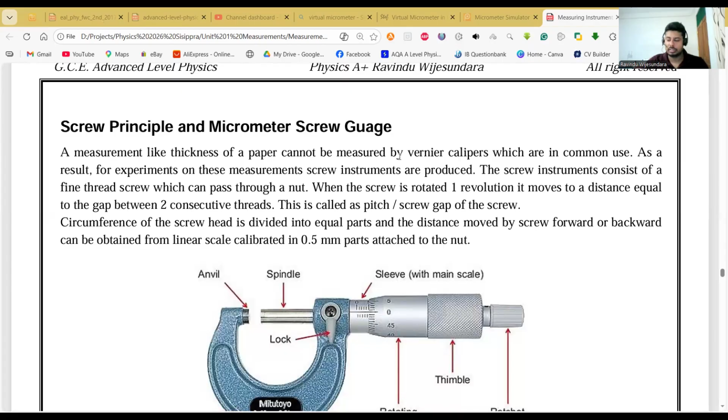Let me show you a virtual simulation of the micrometer screw gauge first. Then we will discuss the important points to be known. We'll discuss the main components there, and then move into the reading part.

So here you have a virtual micrometer. I will put the background to white so it's clearly visible to you. You can see here, this is the structure of the micrometer.

There are a few things that should be considered when you are taking a micrometer screw gauge in your hand. The first one is, as in the vernier caliper, we need to know the minimum measurement that can be taken and the maximum measurement that can be taken. That is called the measuring range - what is the minimum, what is the maximum reading we can take.

Usually a micrometer is used to measure distances much smaller than 5 centimeters. The vernier caliper you can use up to 15 centimeters as I showed you last day, but the micrometer we do not use for such larger measurements. We use it only for smaller measurements, like 3 centimeters or 2 centimeters.

Now, if I completely move the ratchet with the thimble to the other side, let's check what will be the maximum reading that can be taken from this one. So if I rotate this one and check.

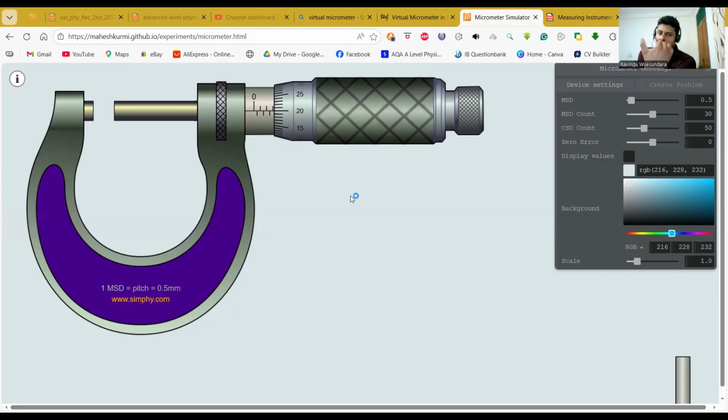You see here you can check the screw principle using this one. Take the right hand. Now I will rotate this one, then you can check to what direction it will rotate. I am rotating in this direction, so you put your fingers this way towards your side, and you can see it is moving to the left side - the thumb is showing the right hand direction. So our screw principle is working for this one.

Now, if I rotate to the other side, you can clearly see it rotating in this direction towards the screen. It is rotating towards the screen, therefore it is moving in the right hand direction. So you can apply the screw principle and check whether it is working accordingly.

If I completely move this one to the left hand side, then I can get the maximum reading there. You can see here, this is the 5 millimeter mark. Let me try to move it fast here. So it is actually around 2 to maximum 3 centimeters distance, so the range of this one will be around 30 millimeters.

Now let's see the main scale. You can see here the main scale clearly - here you have millimeter marks. Here 0, here 1. Let me take the laser pointer, then it will be easy for you to see. So these are millimeter scales: 0, 1, 2, 3, 4, 5, like that way.

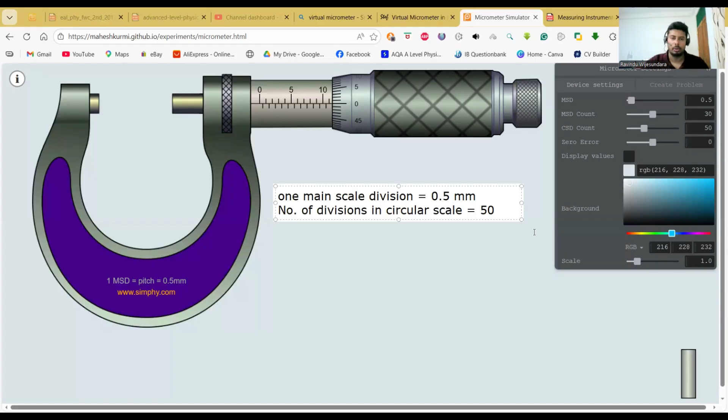Now, let's see, these are the information that we have. Let's see how to calculate the least count of this equipment. So the least count is the lowest or smallest measurement that can be taken from this instrument. Before going to that, we actually need a special term.

Screws have something called a pitch. So what do you mean by pitch is the distance traveled by the screw linearly. This is the total screw, right? The distance traveled by the screw linearly when one complete rotation is done in the circular part. That is called the pitch. It's a small definition. So we call it pitch. Pitch equals

linear distance traveled during one complete rotation. This is called the pitch.

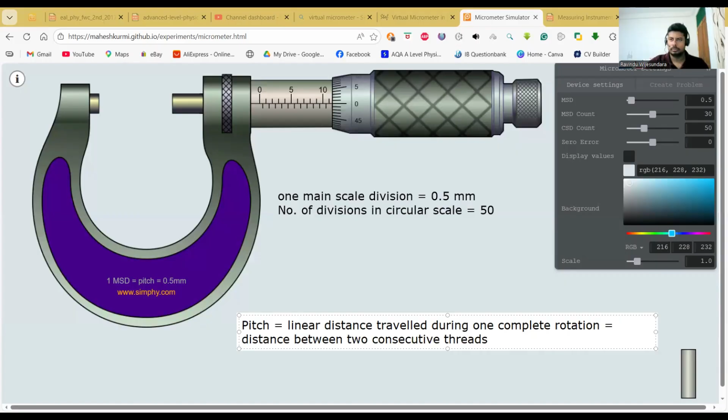We call this the thread angle, and also the pitch angle. That is also considered, but for our case, we only need to know about the pitch. The pitch is basically the distance between two consecutive threads, and it is exactly equal to the distance traveled when we rotate by one rotation.

So if I rotate this one revolution, let's check how much distance it will travel. First I will take this to a clear position, somewhere here.

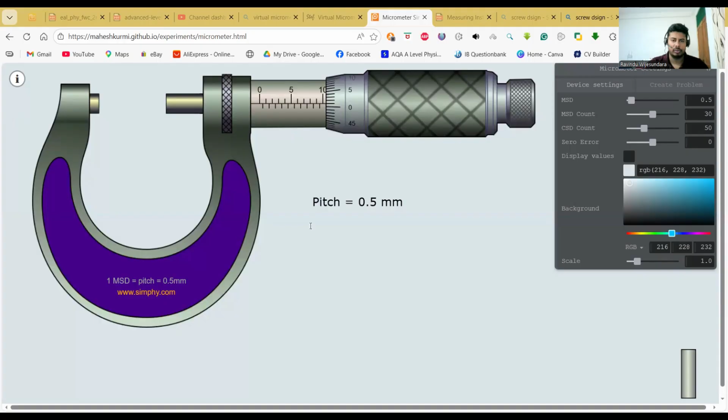Least count is equal to... if I move the circular scale by 50 divisions, it moves 0.5 millimeters, so I need to find the distance moved per one division. I have to divide 0.5 by 50 millimeters, and you get the answer as 0.01 millimeters. So you can see this has a very small least count.

That means the accuracy of this instrument is much greater than the vernier scale. So the micrometer screw gauge accuracy is greater than the vernier caliper accuracy. I hope this is clear.

If you generalize this formula, the least count formula can be written as: least count equals 0.5 millimeters, which is the pitch of the instrument, divided by 50. What do you mean by this 50? It is the number of divisions in the circular scale.

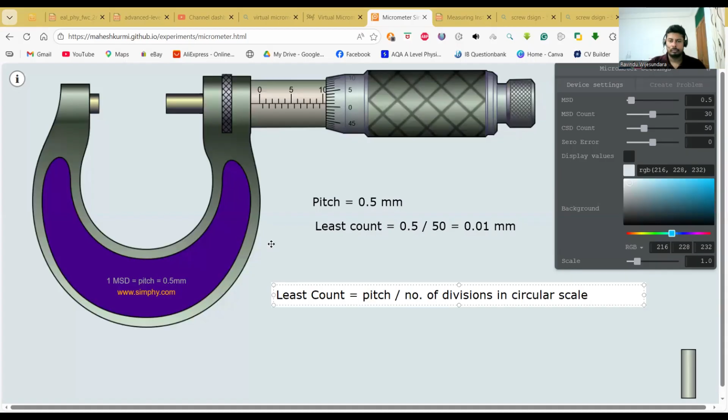So let's go one by one to get the reading methodology, how to read this one. Let me erase this. So the reading is actually similar to the vernier caliper - first you have to take the main scale reading.

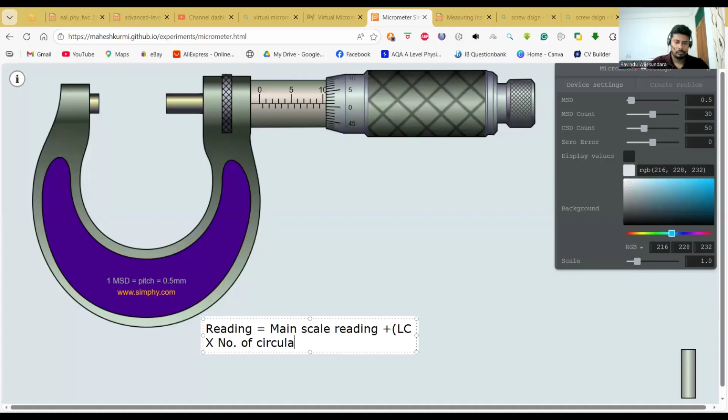First you take the main scale reading. Then you have to add the least count multiplied by the number of circular scale divisions. Least count multiplied by number of circular scale divisions, number of circular scale divisions. So this is how you read the micrometer screw gauge, right?

So you just need to keep this in mind. This is similar to the vernier caliper. We have done a lot of examples last week regarding the vernier caliper. The same procedure you can follow. Rather than saying the number of divisions coincide with the main scale like in vernier caliper, here you have to get the number of circular scale divisions coinciding with the main axis of the main scale.

Okay, now let's see, we will read some values. So let's say I am moving this one to this side and I am randomly stopping this one somewhere.

So what we have to do is we have to read this one. What is the reading of this one? Let's say I am stopping somewhere here. A random stoppage, I did a random stoppage. Now we have to read this one. Now we will carefully look at what is the main scale reading.

So if you go here it is the 5th millimeter mark, then 6, 7, 8, and 9. Now you are checking the edge of the micrometer screw gauge, checking which main scale division is passed by the edge. So if you see clearly, 6, 7, 8, and 9 millimeter has already been passed. So the main scale reading is 9.

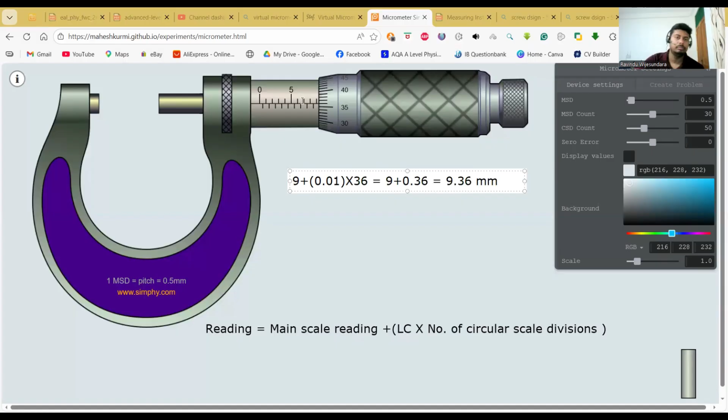I hope this is clear how to take it. This is not actually difficult, it's very easy, but we have to be very careful when we are taking what we call the main scale reading.

Okay, we'll try another example quickly. So I will turn this one and randomly stop it, right? We'll turn the bit to somewhere here. Okay, I will stop. Now let's see how to read this one.

Now if you check here, what is the main scale reading? So you can see 5, 6, 7, and you also can see the bottom line visible, which means the 0.5 mark. That means 6, 7, and 7.5. So it has actually turned up to 7.5. So the main scale reading will be 7.5 millimeters.

Plus, you have to put the least count, 0.01, multiplied by the number of circular scale divisions. If you see here, you can clearly see that is 41. Therefore you take the summation of these two, 7.5 plus 0.41, which will finally give you 7.91. Therefore the reading is 7.91 millimeters.

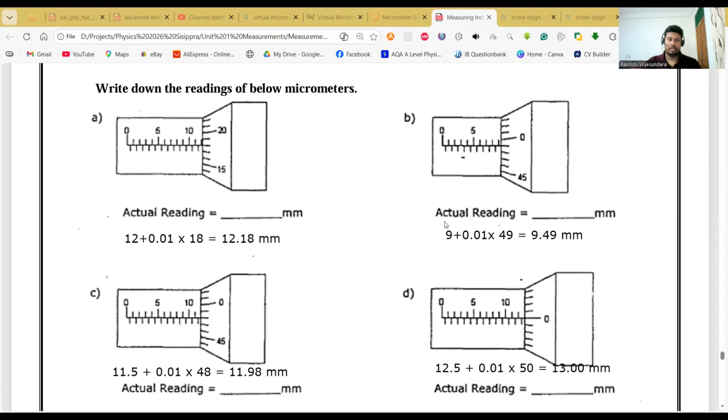Now we'll move to the next few examples. If I have made any mistakes here, now try to correct them in the following examples. Now you try to do these 4 examples without getting wrong. Now you can do this one, so try to do this one now.

If you go to question number G, you can see the main scale reading, that is basically 13.5. Therefore, 13.5 plus 0.01 multiplied by 31. Therefore, you can see here that is 13.81 millimeters. Those who have got this correct, very good.

Then if you go to question number H, you can see here the main scale reading is 1, 2, 3, and you have a small mark here that is 3.5. 3.5 plus 0.01 multiplied by 35. Therefore, it will be 3.85.

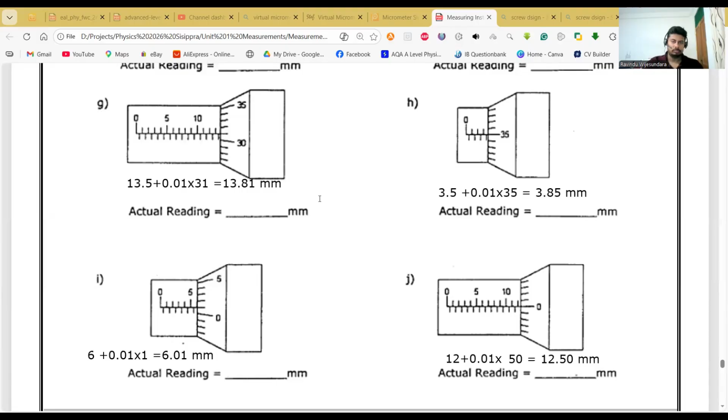Now let's move to the systematic errors associated with the micrometer screw gauges. What are these errors? Like in the vernier caliper, we have two kinds of possible errors in micrometers also. Right here, these are labeled as positive zero error and negative zero error.

So how to identify whether there's a zero error or not? Let's check how to identify that. When the end of the screw and the surface of the stud are in contact with each other, the linear scale and the circular scale reading should be zero.

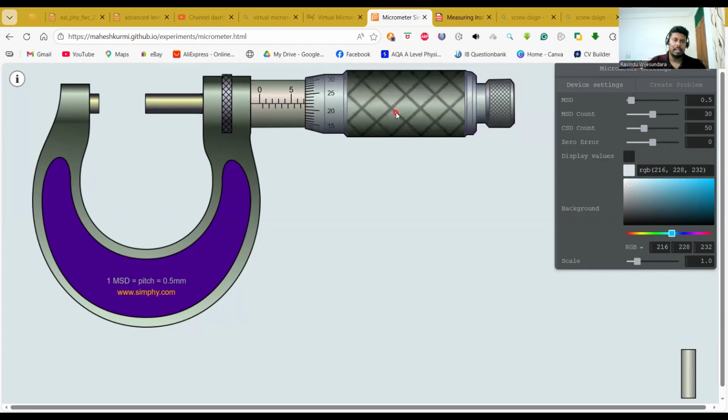If I use the virtual micrometer screw gauge to demonstrate that, what you have to do is rotate this in this direction until the anvil and its spindle touch each other. Rotate like that until the anvil and the spindle are touching each other. I will rotate faster.

These simulations are free and you can see them actually. This is very good. So there you can understand what is actually happening here. Okay, now you can see.

Do you hear some sound? Tick, tick, tack sound, can you hear that? In this simulator also you are getting a tick, tick sound. When you come here and still try to rotate this one, it gives a tick, tick sound. That means you cannot turn furthermore because the anvil and spindle are already in contact with each other, so you cannot move this spindle more forward.

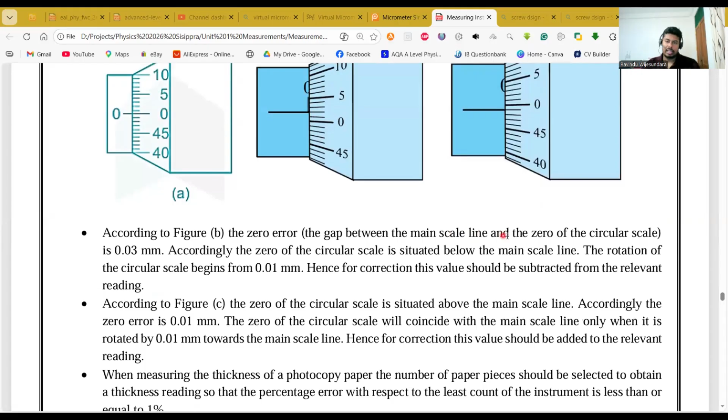According to figure B, the zero error, the gap between the main scale line and the zero of the circular scale is 0.03. So if you go here, you have to calculate the distance from here to here. So it is actually not 0.03. This value is wrong, we have to correct this one.

This is the mark which is coinciding with the main scale. Now you count downwards to where the zero of the circular scale is located. Then there are two divisions, that means 0.01 multiplied by 2. Therefore, the zero error of this one is plus

0.02 millimeters, right? Now, if you go here, you can see clearly it has got one division more. Therefore, this one has a negative zero error and it should be 0.01, because only one division is rotated in the upstream, right.

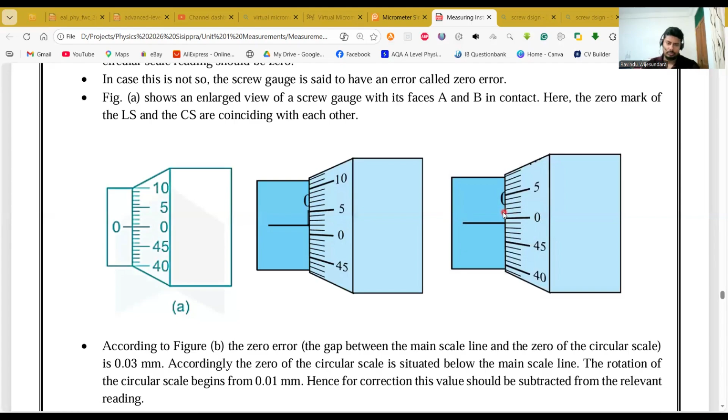Okay, according to figure C, the zero error of the scale - you have given the same description there, how to get that one.

Right, okay, now let's see what are the zero errors of the following micrometer screw gauges, whether it is a positive zero error or a negative zero error. Okay, now I will show you how to do the first question, then you can continue with the other questions.

If you go to the first question, now you can see here, this has been early stopped because we have to rotate this one furthermore to bring the zero mark of the circular scale to the main scale zero mark. You have to further rotate this one like this way. Then only it will come here.

You can use this principle also, this right hand principle also. We use this right hand principle. So you have to turn, you have to move the micrometer in this direction, left hand direction - the edge of the circular scale, you have to move to the left hand direction. Then you have to turn like this.

So when you are turning like this, it has stopped earlier. How many divisions earlier? 1, 2, 3 - three divisions earlier. Therefore, your zero error value is plus 0.01 multiplied by 3, that is 0.03 millimeters. This is the answer of that one.

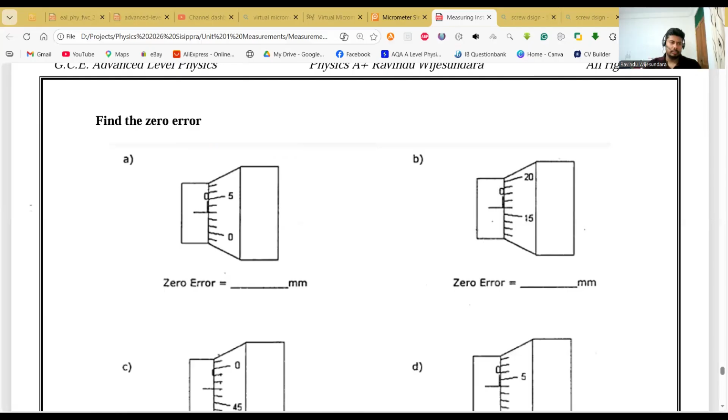Now, you can use the same methodology, the same way that you read the micrometer screw gauge readings, to get the zero errors of the others also. Right, now it's time for you to do this one. So quickly try to get the zero errors of these micrometer screw gauges. So you have 4 examples to complete. Okay, quickly start and do that one.

Okay, now if you go here, the first one we have discussed, and the second one - let's discuss the second one. So here also you can see the main scale zero is not yet reached, right? So if you rotate more, then only it will come to here. And you can see the line of the zero mark also, that means it has been stopped a bit earlier, right.

Therefore, if you go here, what should be the main scale reading? That is 0 actually. So you have to multiply 0.01 by the number of divisions - how many divisions is it actually?

The variation is how much divisions? We have to rotate more. So this is the 16th one. 15, 16. Therefore, you have to rotate this one 16 divisions more to bring 0 to here. Then only you can make 0 and 0 coincide. Therefore, you have to rotate 16 divisions.

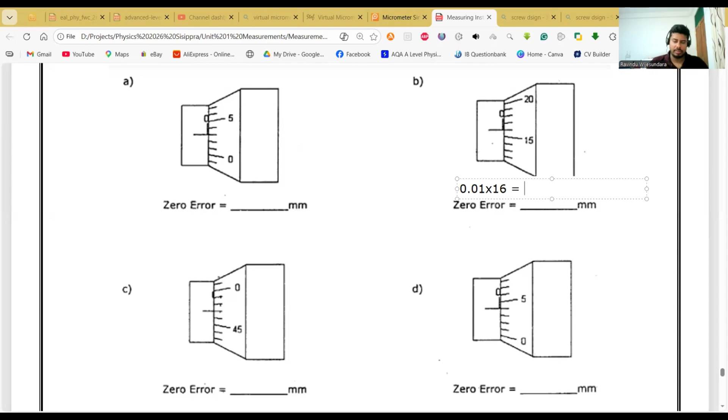That means the error is, it is pre-stop. That means a positive zero error and the value is 0.16 millimeters. This is the 16th, right? Okay, now if you go to here, the C1, so you can see here,

0 of the main scale is located somewhere here, and you can clearly see that it has overturned now. That means the 0 of the circular scale has already passed the main scale 0. So definitely this should be a negative zero error. And how many divisions? 1, 2, and 3 divisions. So it should be negative 0.01 multiplied by 3. That means negative 0.03 millimeters. That is for C.

If you go to the D one, you can again see here clearly it has been pre-stopped. So you have to rotate this amount of divisions to bring this 0 to here. That means 0.01 multiplied by how many divisions to rotate to get to 0? 1, 2, 3, and 4. Therefore, this is a positive zero error, that is 0.04 millimeters. So all these positive zero errors that you have obtained must be reduced from the final reading.

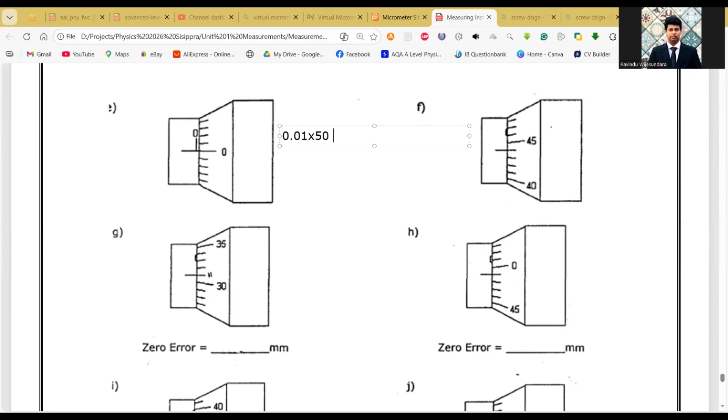That means it should be a positive zero error. That means 0.01 has to be multiplied by, here the number of divisions should be 50, not 0. Then 0.50 millimeters is the zero error of this one. Right? Okay, if you go to here to get the zero error of this one, sorry, I have turned off the camera.

Okay, then if I go to here to get the zero error, so what will be the zero error here? So here the main scale division, you cannot see actually 0. That means this has turned more past the main scale 0. So how many divisions has it turned more? So this one is actually 40, 41, 42, 43 and 44 divisions. It has been here. So how many divisions

away from actually 50? So what is the difference between this point and the 0th mark? The 0th mark will be located somewhere at the top, right? So you know that if it is 45, 46, 47, 48, 49 and 50, so there are how many divisions? 6 divisions are there, right? 44 to 50 means 6 divisions are there. Therefore, this has been moved 6 divisions more towards the 0. Therefore, the zero error must be negative, 0.01 multiplied by 6. Therefore, negative 0.06 millimeters is the zero error.

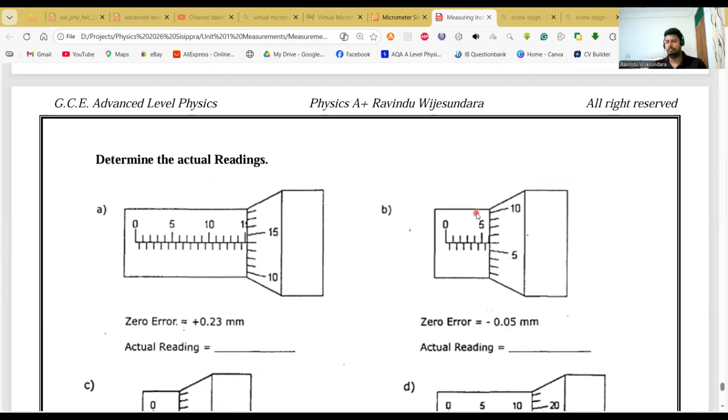Then, how to determine the correct reading. So in these examples, I have actually given the value of the zero error. So you have to eliminate the positive zero error, you have to reduce the value. To eliminate the negative zero error, you have to add the value. That is what you have to do, right? So in all the examples, I have already given the zero error value, so you have to write down the actual reading.

Okay, so let's start with the first four, A, B, C, D. So like earlier, I will give you 2-3 minutes. Please try this one. This is important because today also I will show you the A-level examination question examples from this one. Right? Okay, quickly do this one now.

Now, if you go to the question G, then we can write the main scale reading first. What is the main scale reading here? If I write from here, the main scale is 11 and 11.5. 11.5 plus 0.01 multiplied by

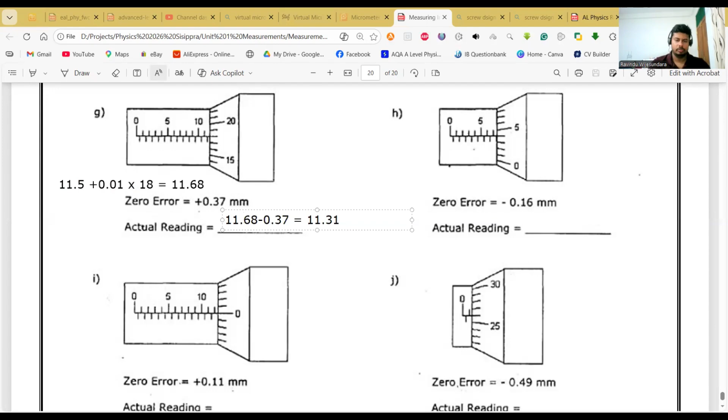11.31 millimeters. If you go to this one, then what is the main scale reading? You can see here 6, 7, and here also you can see it has been only 4. That means in order to get 4, first you have to pass 0. So it must be, it has not reached yet the 8th mark, but you can see, if you see from the bottom, it has just passed the 7.5 mark.

So the main scale reading is 7.5, and you have to add 0.01 multiplied by 4. Therefore, the final answer is 7.54, and then we have to add 0.16 for this one. 7.54 plus 0.16. So this will give you 54 plus 16, 64, 70, 7.70

millimeters. Right. If you go to question number I here, so you can see it is the main scale reading. You can see here it is 1, 2, is 12, and it is again completely 0. That means the main scale reading must be 12.5 plus 0.01 multiplied by, there are no divisions passed, it is exactly 12.50.

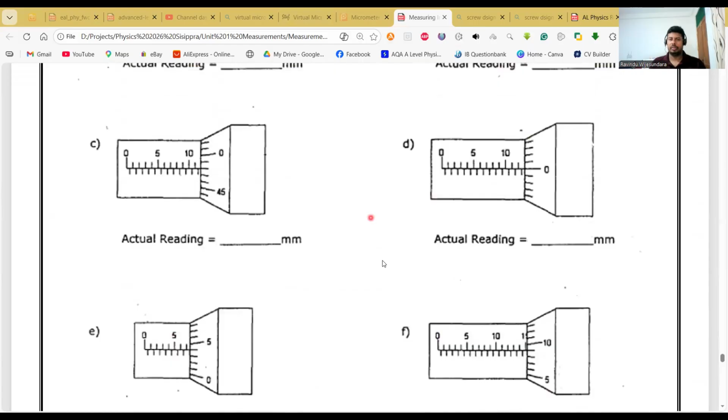So these are the corrected readings of these examples. I hope you have completed the examples along with me. Now, if you have any questions regarding the examples we discussed, please raise them. Okay, so this is what we have to discuss about the micrometer screw gauge.

This is how to take the reading. This is how to take the zero error. This is how to calculate the least count. Now you know how to use two measuring instruments: the first is the vernier caliper, and the second is the micrometer screw gauge, which is even more accurate.

But both of these equipments have one constraint. Each time you take a measurement, you have to keep the object in between two parts. In the vernier caliper, you have external jaws or internal jaws, and you have to tighten it. Here we have the anvil and the spindle, and you have to tighten the object in between these two components.

So if you do not have a rigid body like a metal ball, a stone, or hard plastic, then you cannot actually measure. If you have a rubber ball or a balloon, if you have flexible material, then there's a problem using these instruments. It is not possible to measure, because when you tighten the instrument to keep the object between the jaws, it will deform, and then you cannot take the measurement.

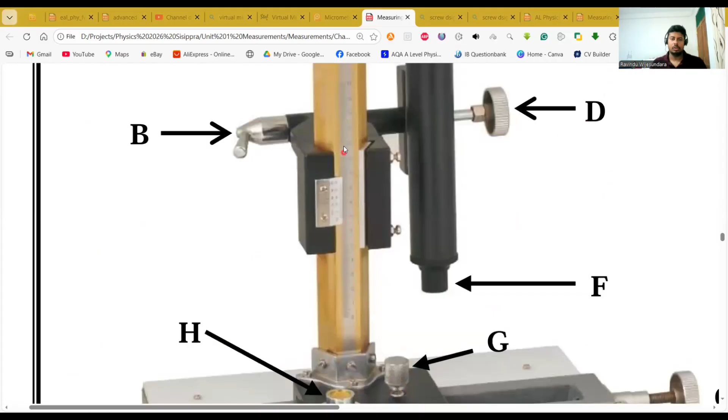And you can see here there's a small scale also. This is actually a type of vernier, a vernier scale. Right here is the vernier scale, and right here is the main scale.

Now if you move to part B, that is the screw to fix the microscope vertically and horizontally. Now if you keep it like this, when you are taking a measurement, if this gets a shot from your hand, a mistaken shot, then this one turns away and you have to focus again. So there must be some locking mechanism, and B is used to lock this one.

So if you make it horizontal, you lock from here, then it is fixed. If you need to look vertically, you turn the microscope vertically, then lock. So B is the screw to fix the microscope vertically and horizontally.

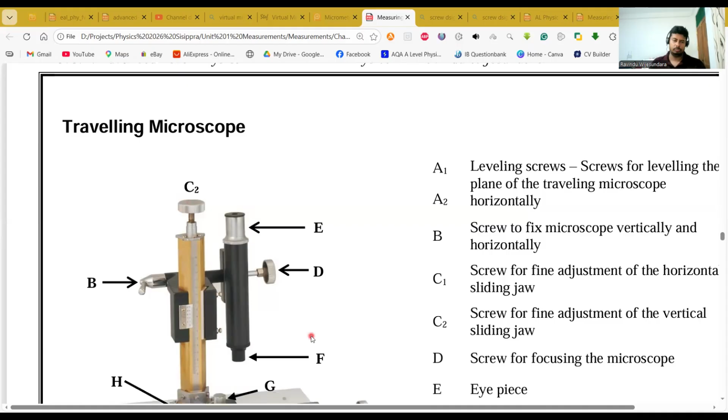Then if you go to C2, this is for the fine adjustment of the vertical sliding jaw. What is that vertical sliding jaw? This whole part attached to the gold color part is like a jaw, that is why we call it the sliding jaw. You can move this sliding jaw up and down, and you do that by using this C2 screw.

Screw C2 is for the fine adjustment of the vertical sliding jaw, meaning very small adjustments. For large adjustments, you use B to loosen and move the complete jaw up and down wherever necessary, then bring it to the required point and tighten it so the sliding jaw is fixed. Now if you need very fine adjustment, like half a millimeter, you use the C2 screw for vertical adjustment.

We have already discussed these parts: this is the vertical sliding jaw, this is the locking pin or locking screw, this is the fine adjustment screw for the vertical sliding jaw, this is the eyepiece, this is the focusing screw of the microscope, and F is the objective piece. Next is the bottom part.

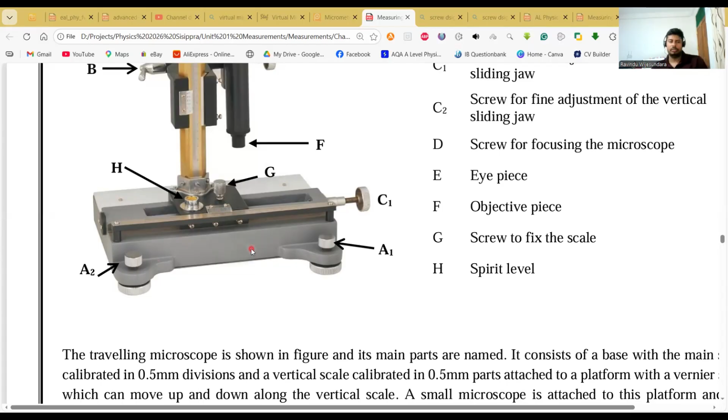So you don't need four screws to adjust - using only these two, A1 and A2, you can do it. How you adjust is: you first adjust one, then adjust the other, not both at once. You adjust one first, then look at the level, then adjust the other. Doing this a few times, you can adjust it quickly.

Now H is the spirit level, used to check the horizontal level of the microscope unit. Then G is actually used to fix this vertical unit. Why do we need to fix the vertical unit? Because the vertical unit is movable actually.

You can see this C1 screw, labeled fine adjustment of horizontal sliding jaw. Similar to the vertical sliding jaw, this one is fixed to a bar. This bottom black part is placed on this bar, and importantly, you can move this along this section. This is the screw to push or pull it - rotate in one direction to push it forward, rotate the other way to pull it back.

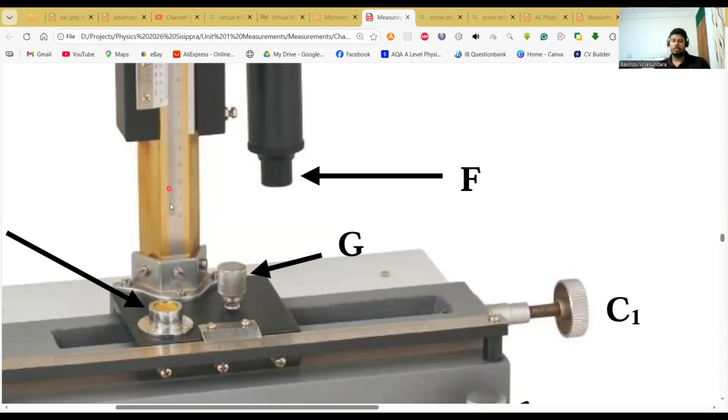Here also we have placed a scale with a vernier scale, meaning we can move this part horizontally. So we have this part to move the microscope unit vertically up and down for height measurements, and all horizontal measurements using this scale. So actually this is a 2D measuring instrument - you can measure two-dimensionally using this instrument.

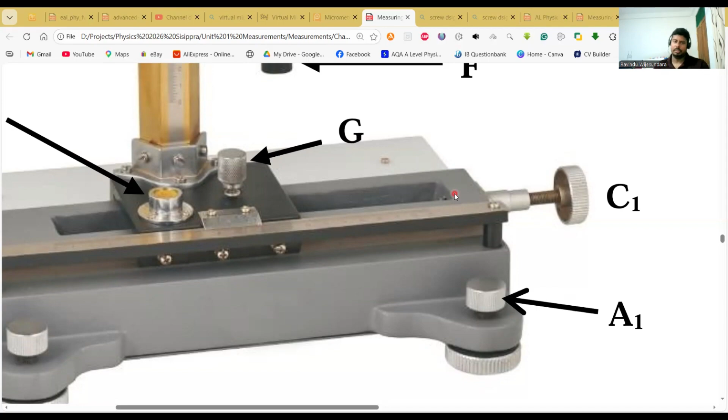Okay, so these are the main components of a traveling microscope. So is it important to know these parts? Are they going to ask these questions in the examination? Yes, no one thought that this one will ever be asked, right? They have asked the micrometer, screw gauge, the vernier caliper - most times they have asked those instruments in the A-level examination. They never thought that this much of a complex instrument would ever be directly asked in a question paper.

But what happened is in 2018, they asked this one. They completely gave this instrument to identify the parts, right? So if I quickly take you to that question, we'll see whether we can answer that one or not. Let me quickly take you there.

And papers here. We have the English medium paper, right?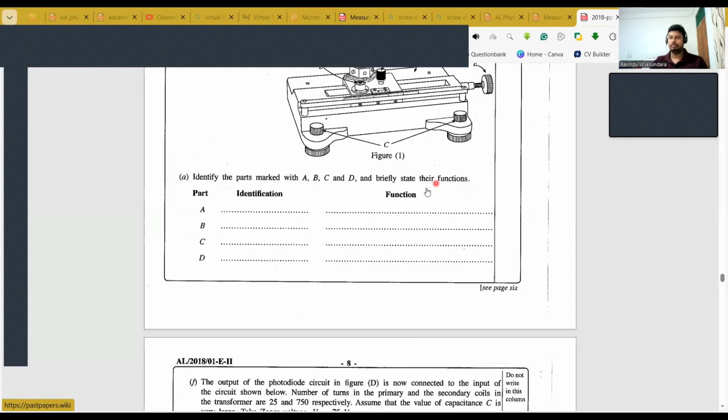So you are given this instrument - see what is the first question. Identify the parts marked A, B, C, D and briefly state their functions. So if you go quickly and identify, now you know what is this A?

This is the screw for fine adjustment of the vertical sliding jaw. You don't need to write the exact words, but you need to convey the idea. So the function of A is: if you rotate this one, you can move the vertical sliding jaw up and down. That is the function of A.

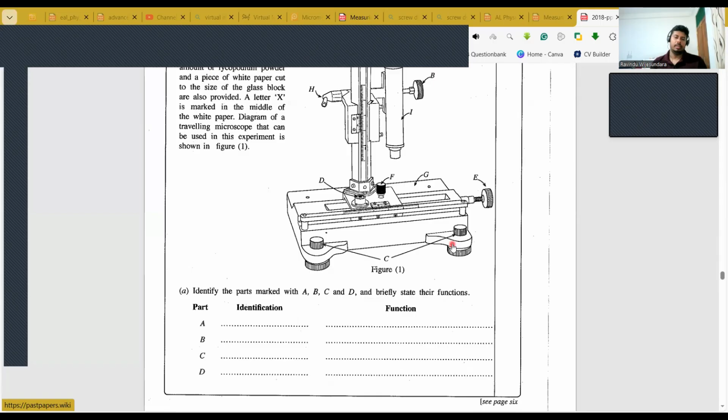Then the function of B is to focus - this is the focusing screw. The function is to focus the microscope onto the object. That is the function of B. Then the function of C - you have two screws here - is to level the instrument. Then D is the spirit level, you can see here. The function of the spirit level is to check the level of the instrument.

If only A, B, C, D is asked, that's enough, but if you go further: E is used to move the horizontal sliding jaw - fine adjustment of horizontal sliding jaw. F means the fixing screw - that means when you move the horizontal sliding jaw some distance, then you fix that part, so that is the function of F. This G actually means the

microscope frame - traveling microscope frame is capital G. And H, you know now, this is the locking screw of the sliding jaw. And I is the microscope itself. But they didn't ask about E through I, they only asked about A, B, C, D and their functions.

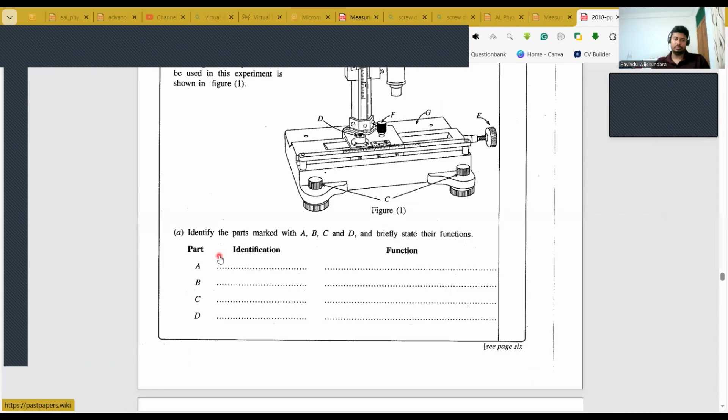So they will never ask about the complete instrument, but they ask only part and then you have to answer. This is a surprise question for all, because if you check all the past papers, you can check up to the 1980s, no issue, you will never find this one. But in 2018, they gave that as part of the structured essay question, and this part actually carried the highest marks. So that is the importance of

paying attention to the lessons and doing the past papers. Those who have done the past papers also wouldn't directly know the answer, but when you do the past papers, you know that this hasn't been asked before, so there's a possibility it could come up. That's why I said, if you do the past papers, you know what instruments have already been asked and what remaining parts they could ask. The importance is really about what hasn't already been asked, what is likely to be asked. So those who actually prepared with this in mind scored a lot by using this question.

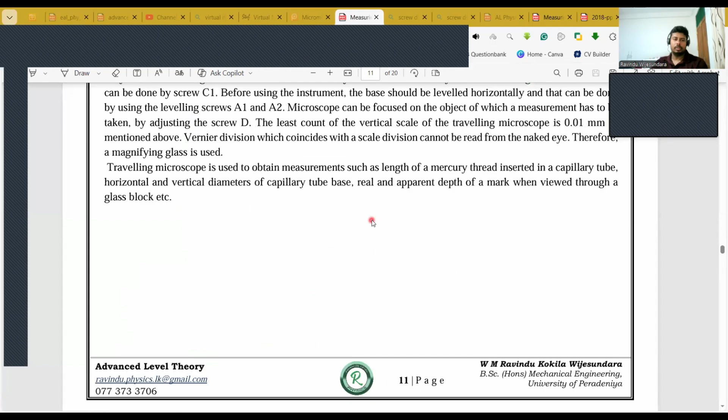Now, we know the uses of this one. So what is the use of this one? So now we will actually go through the statement. Okay, you can highlight when you get the tutorial, you can highlight the important parts.

The traveling microscope is shown in the figure and its main parts are named. It consists of a base with the main scale calibrated in 0.5 millimeter divisions, and a vertical scale calibrated in 0.5 millimeter parts attached to a platform with a vernier scale which can move up and down along the vertical scale. So you have two main scales: a vertical main scale and a horizontal main scale.

The minimum division, the smallest division, is 0.5 millimeters. So they have divided 1 millimeter into two parts. So the divisions are in 0.5 millimeters. And you have a vernier caliper, or a vernier scale.

A small microscope is attached to this platform and the microscope can be fixed in a horizontal or vertical position according to the needs. As I mentioned earlier, by using this B screw, you can lock that one in vertical or horizontal position.

By moving the horizontal platform along the horizontal scale, the microscope can be moved horizontally and the horizontal distance moved can be obtained from the horizontal scale. So you can measure how much horizontal distance it has moved by referring to the horizontal scale.

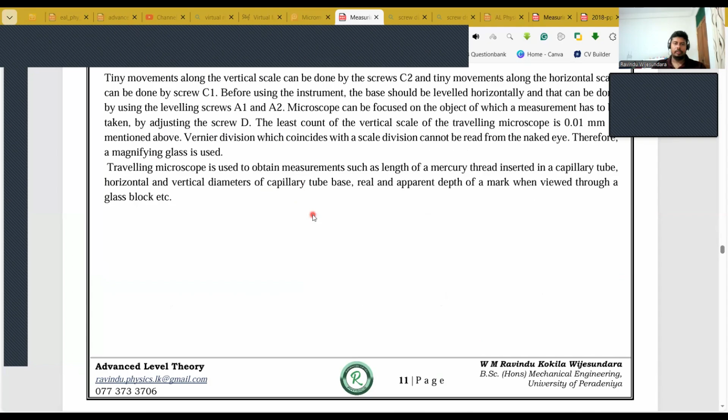The least count of the vertical scale of the traveling microscope is 0.01 millimeters. That is the same as the micrometer screw gauge, right? The least count of the vertical scale of the traveling microscope is 0.01 millimeters.

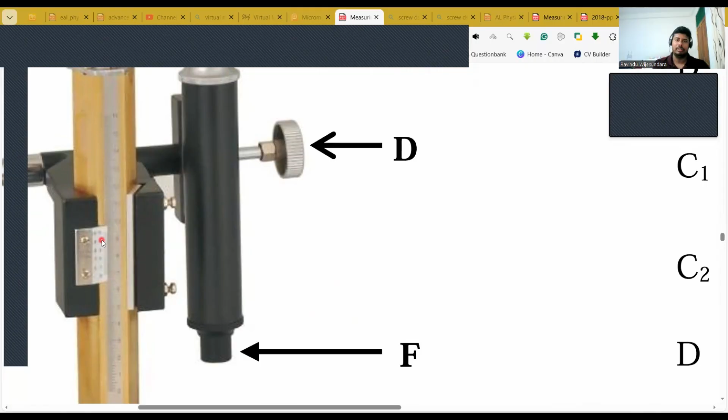The vernier division which coincides with the scale division cannot be read with the naked eye. Therefore, a magnifying glass is used. These marks are very tiny, right, because the main scale is marked in 0.5 millimeters and the vernier divisions are even smaller. So if you really get this instrument at home, you actually cannot read the values properly. When taking a reading from a vernier scale, you have to find the coinciding division, and you cannot do this with the naked eye because the marks are very tiny. Therefore, you have to introduce a magnifying glass for that.

The traveling microscope is used to obtain measurements such as the length of a mercury thread inserted in a capillary tube. This is one kind of measurement, right? A capillary tube is a very small tube. For example, consider the tube of a pen - we can say it's a large capillary tube. So this is your pen, this is actually a type of capillary tube, but this one is a bit larger.

There are tubes which are much smaller than this. Consider a needle where medicine is injected into your body - the diameter of that needle, that kind of thing, is called a capillary tube, very tiny, right? So this one is also a kind of capillary tube. If you need to find the diameter of this, since it has a very small internal diameter, you cannot use either the vernier caliper or the micrometer screw gauge. You have to use the traveling microscope, right?

And it is given that the traveling microscope is used to obtain measurements such as the length of a mercury thread inserted into a capillary tube. Just imagine this is mercury - it's actually ink, but let's assume this is mercury.

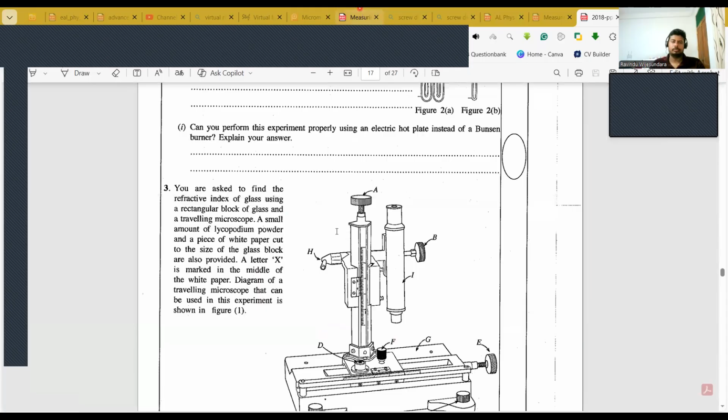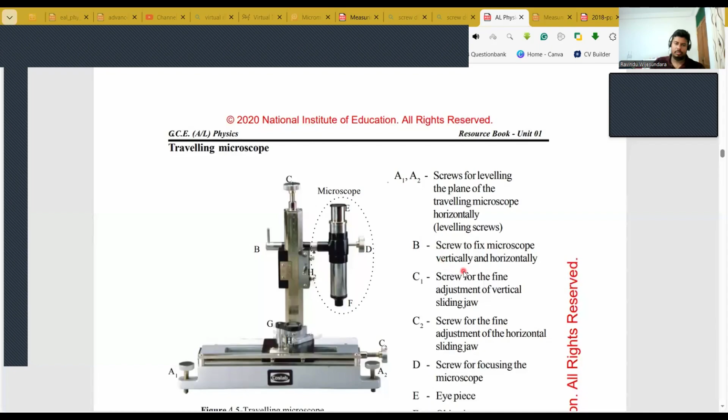This is the diagram they have given, and these are the parts. So we have a special part here, this one.

Some are actually equipped with what you call a magnifying glass, used to read the level. So you can look at the level and use it to read the vernier scale. For the vertical scale, you don't have a magnifying glass already installed, but for the horizontal scale, you have an installed magnifying glass, very small, but for the vertical one, you don't. Okay, so these are the main components.

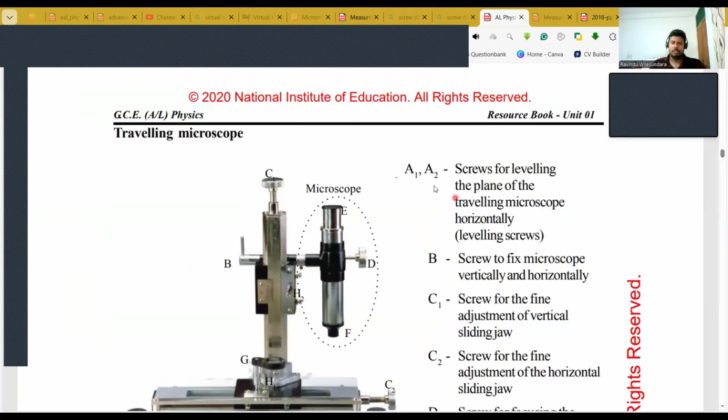So this is actually what they can maximum ask, right? So I have included this text actually for your reference.

So this is the vernier scale. This kind of vernier scale is actually located here, we call it the extended one. Last time also, when we discussed the vernier scale, I mentioned the extended vernier scale. So this kind of vernier scale is actually located there.

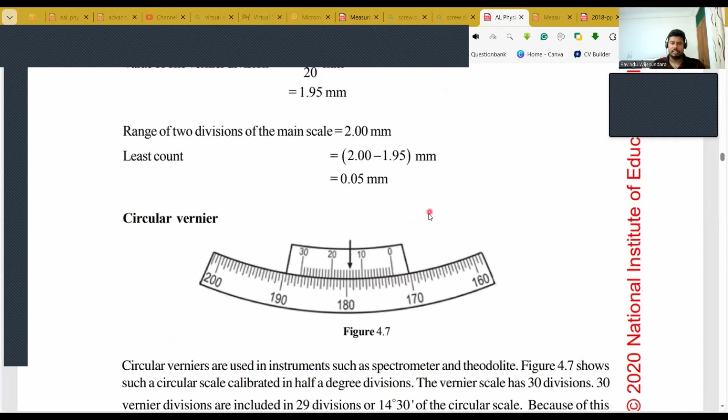Right, okay. These are the things you need to know about the traveling microscope.

Now you can actually do the questions.

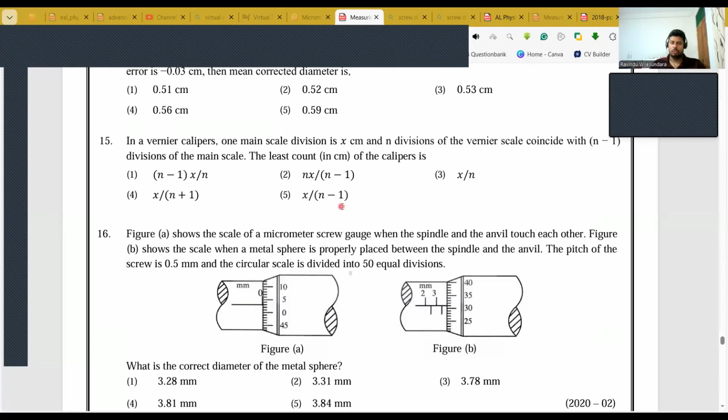So let me show you an example from the past papers. This is 2020, the second question. It is from the micrometer screw gauge. So first you are given a defective one.

That means an instrument with a zero error is given in the first diagram, figure A. Then you are given a reading taken with the micrometer screw gauge. Then you have to find the correct diameter of the metal sphere, find the error from this one, and check if that is positive or negative. Then we have to read the micrometer here.

Then you have to take the final correct diameter. So my advice is to please go through these questions and try to do them.

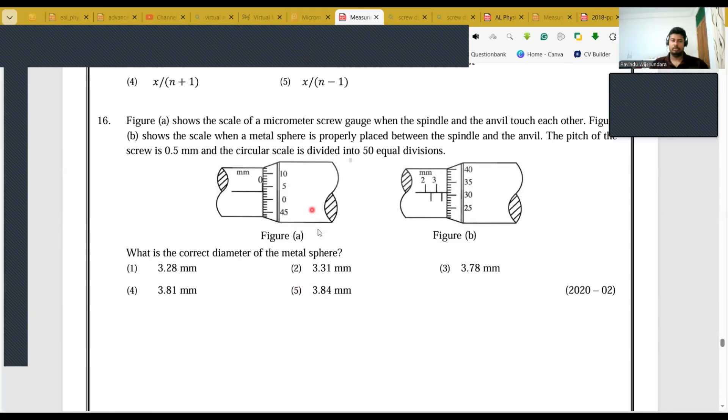Okay, so answers are not given here. So you do this one first and then send me the answers. You can put the question number and your answer, what is your answer. This is MCQs now, so you can easily do this one.

So please try to do this one, because all of these are possible exam questions. I don't have very many, like 50 or 60 questions from this one. This is a limited number of questions, but all these questions are exam standard questions. Therefore, please do this one by yourself.

Okay, right. Then we can move to the next part of our lesson, the tutorial that you have, including the spherometer. So let me open the tutorial, then we will start discussing that part.

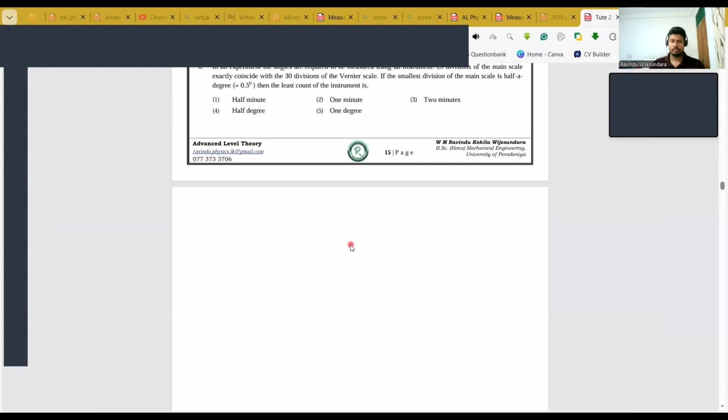Okay, before moving to this spherometer part, let me quickly take you to the practical guide also. Let's go to the practical guide, then we will check what things are available in the practical guide.

So here you can see the practical guide also. We have the first practical, that is usage of the vernier calipers. At the last day also I explained what are the things they can ask. I showed you an example, the 2020, 2014 examination paper.

And the usage of micrometer screw gauge, we have discussed that one. We have past papers on that one, so I will share them with you. I have hard copies, so I will convert them into PDF documents and share with you. The third one is usage of the spherometer, which we have to discuss next, and usage of the traveling microscope. So you see here, 4 of the instruments are already given as 4 practicals in the syllabus.

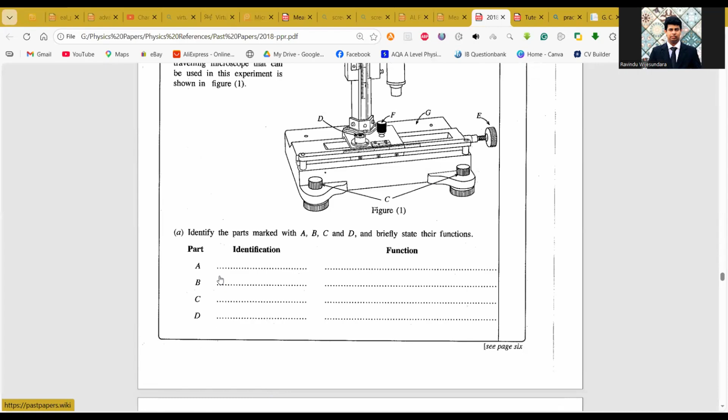That means definitely they can give a question from there. They can mix it up, but they will not give a total question from one instrument. What they do is use the instrument as a part of the question. As I explained in the 2018 question paper, they didn't give the total question from the traveling microscope. This was a part of the practical, like if you have A, B, C, D parts, this is part A.

Okay, so if you go here, I will share this document with you. In this document, you find actually how to use these instruments. So what we discussed last week, external diameter measurement, how to measure the internal diameter, like that.

This practical was actually given in 2014. If you can remember, finding the internal volume of a hollow cylinder. If you can remember this question that we discussed, they have given something like this, a diagram with a hollow section, that's what they have given.

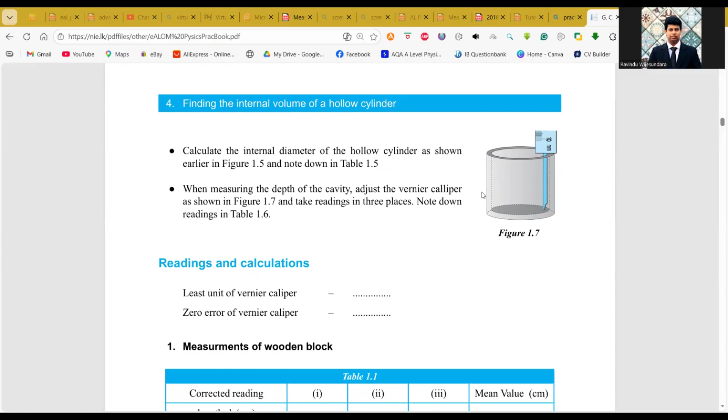So they are not actually going out of the syllabus. They are always within the syllabus, and they are giving the questions from this resource book. Even sometimes they will use the same diagram here. We have seen the tables, right?

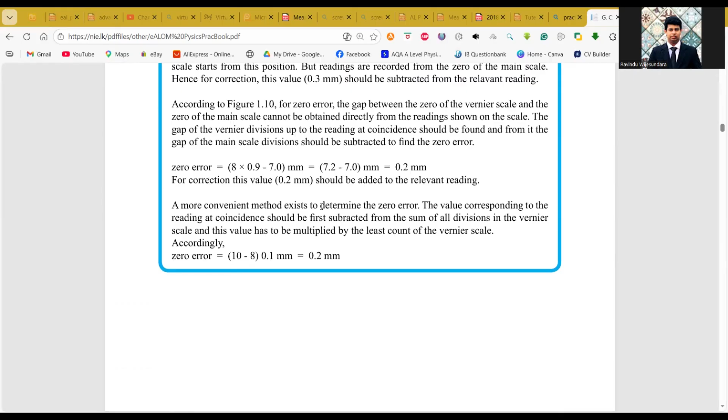And how to read there, it is given as 0 errors. But I have explained them in detail, more than even how they have noted in this document. I have gone in detail into how to do the 0 error calculations, how to read, how to find the least count, like that.

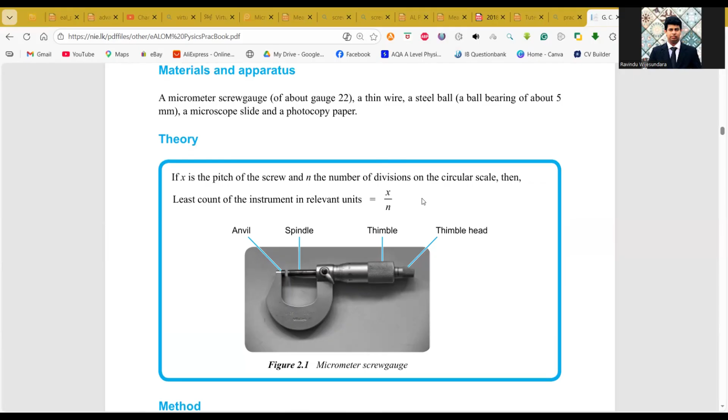And for the micrometer screw gauge, the parts we have already discussed, and how to check whether it has a 0 error or not, how to obtain the least count of the instrument, what do you mean by the pitch. We have discussed almost all the parts, so please refer to this document also, it's important. I have used these diagrams to show the 0 error.

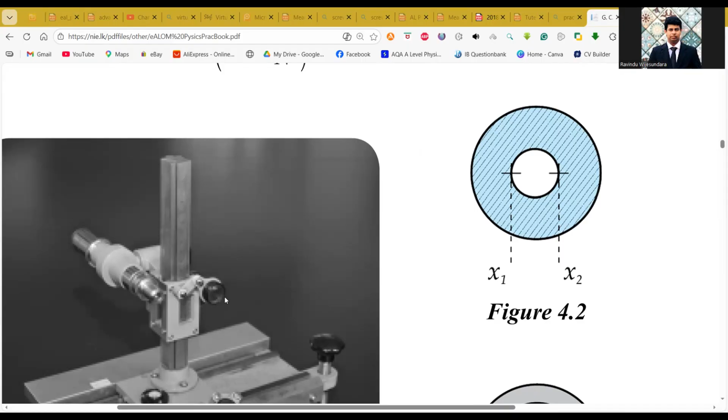Then we have the spherometer, so we will move into that next, and we have the traveling microscope. Now in this diagram, you can see it, how it is horizontally oriented. You see the microscope is fixed horizontal, and you can see here, you have the magnifying glass for the vertical scale.

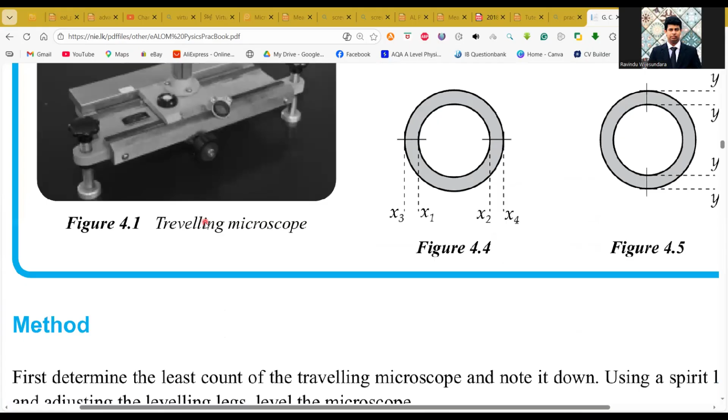And you have the magnifying glass for the horizontal scale also. See here, this is the magnifying glass for the vertical scale. These are the adjusting screws, this is the spirit level, and this is the locking screw. The locking is not available somewhere here, so this is the locking screw. The fine adjustment screws are actually not visible here.

Okay, so how to use this one is, finding the least count is similar to the vernier scale, because you only have a main scale and a vernier scale. So you can follow the same method to find the least count, the same method we use for the vernier caliper, because we have a main scale and a vernier scale here. And this is how the measurements are taken.

Just imagine you need to take the internal diameter of a glass tube, something like I showed you, the internal diameter of the ink tube of your pen. So it has some thickness like this, and you have to measure the internal diameter. Now see the technique that we use.

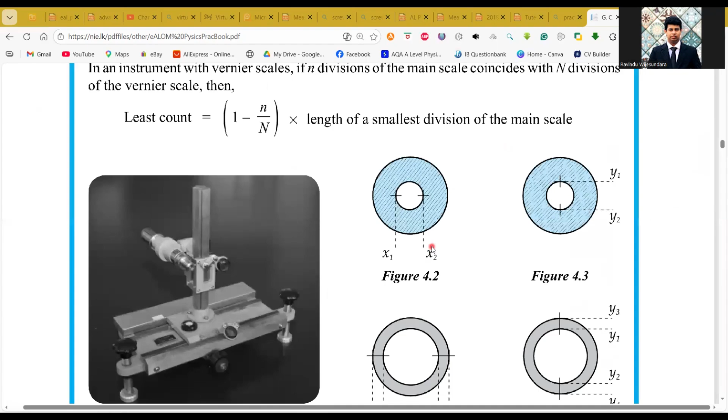Now this is a microscope, so when you see through it, you can see a very enlarged image. When you are looking at this image, actually you can see crosshairs. What do you mean by crosshair? Let me draw a crosshair and show you. I will use this space to draw it. You actually know what a crosshair is, but I will draw and show you.

If this is the seeing area, when you keep your eye on the eyepiece, you can see a circular disc, a circular light spot. Through that light spot, you can see the crosshairs. It's divided into two parts: a vertical crosshair and a horizontal crosshair. So it is like a target.

You know that when you are doing targeting, this is how it works. In a gun also, this same targeting mechanism is used. So this exact center, the intersection point, is the exact center. It's like a targeting mechanism. We call them crosshairs.

If you look through the eyepiece, you can see these crosshairs. If you don't see these crosshairs, that means you haven't adjusted the microscope properly. Using the screw adjustment, you have to turn the screw and adjust it such that you can see the crosshairs clearly.

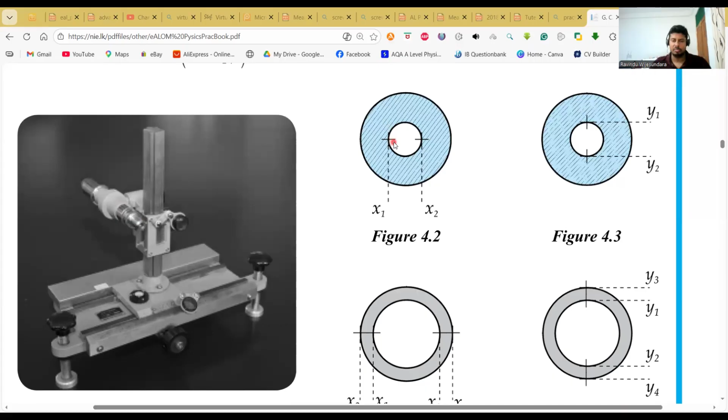Then you take the measurement of the horizontal vernier scale and write down the reading. Then you move the crosshair to here, directly to the other side without moving up and down, because the microscope is fixed in the vertical scale and not moving up and down. So you can move it back and forth only. First keep the crosshairs at this point looking through the eyepiece, then take the crosshairs to this other point and write down the measurement.

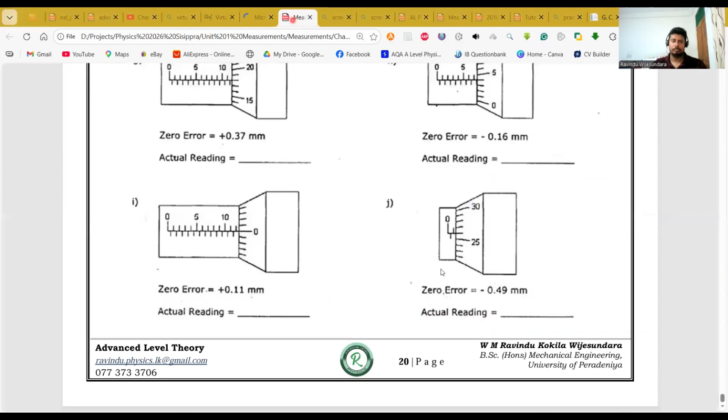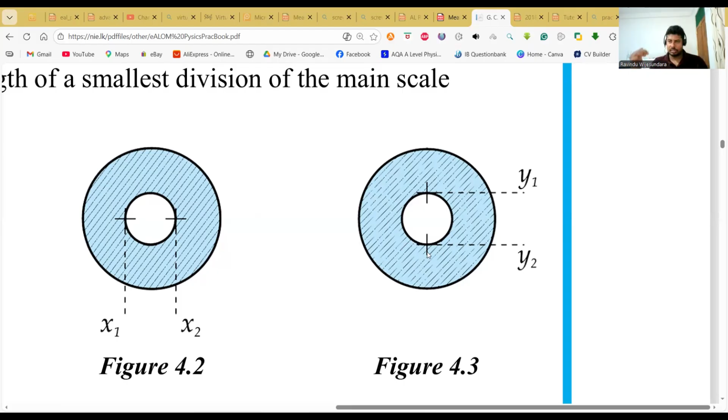Then you need to take this crosshair downwards. So if you need to take the crosshair down, to which direction do you have to move the sliding jaw, vertical sliding jaw? You have to move it towards the up. Using the fine adjustment screw here - this is the C2 screw - you can move the sliding jaw up, then the crosshair will come down. That is because of the inversion, image inversion, right?

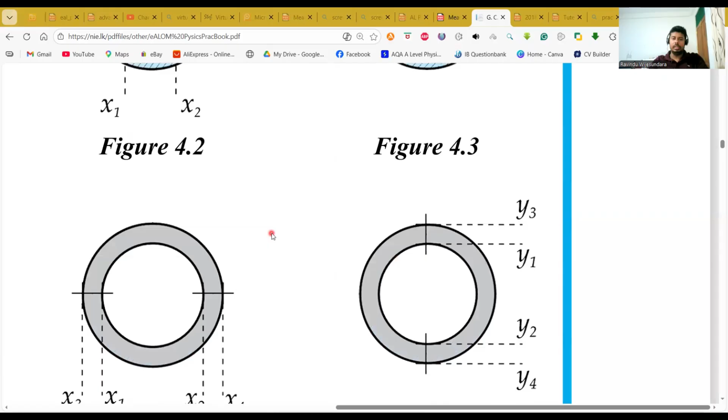So you have the two readings now. Then you take the separation. Then you have the horizontal and vertical diameter. You have calculated the horizontal diameter, you have calculated the vertical diameter. So you can add these two values and take the mean value. That will be your diameter.

Taking the mean value - we discussed that to remove the random error, what you can do is take 2 measurements or 3 measurements and take the mean value. So here what we are doing is actually removing the random errors, or any abnormalities or any unevenness in the tube. That also can be removed by taking 2 measurements and taking the average.

Then if you go here, this is a rubber tube and we have to measure the thickness of this rubber tube - that means internal diameter and external diameter, right here. You can measure it in a similar way. If you need to move the crosshairs, you have to start from one side and take measurements here, here, here, and here. Here also, you can take the internal diameter first, then external diameter, internal diameter, external diameter.

So the separation between external diameter and internal diameter will give you 2 times the thickness. Here also, 2 times the thickness. Then finally you can take the average and find the thickness of the tube. These are very simple values - after you take these values, the rest of the calculation part is simple actually. Taking the measurement is the difficult part.

So you can see here how the method is given. First, determine the least count of the traveling microscope and note it down. This is the first step for the experiment. So when someone is asked what is your first step when you have been given an instrument - as I mentioned last week also - it must be what? Finding the least count, that is the first thing.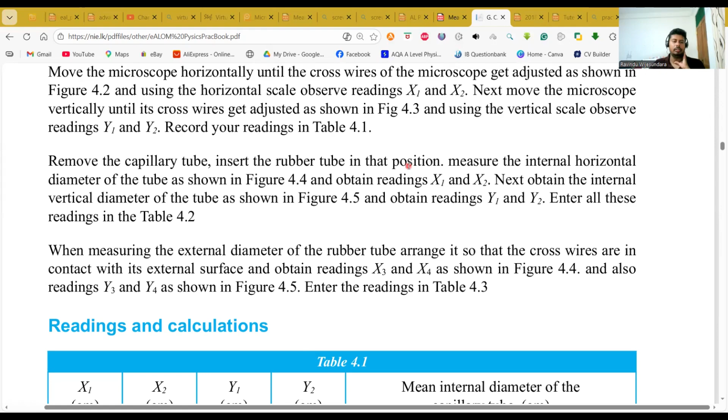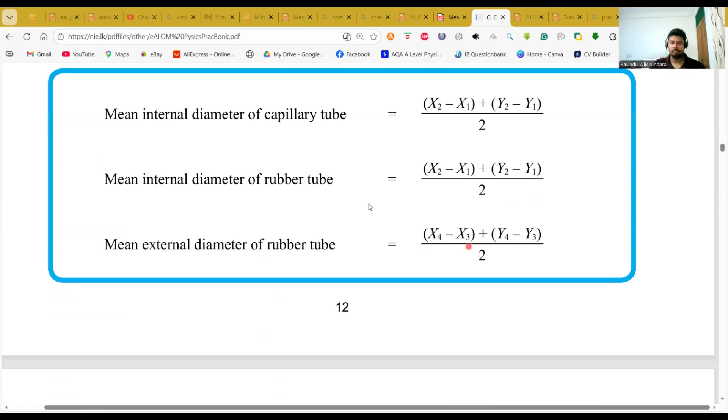That is just practical, right? So you have the table, you take the values, you take the internal diameter mean value, you may take the mean internal diameter of rubber tube. So like that way you can take mean values. Here you can see there's difference divided by 2. So these are the values. So the most important part is the conclusion part.

Record your conclusion in accordance with the above calculations. You have to put a conclusion on that part. Present your opinion about the above conclusions and their errors, and also suggest your suggestion about obtaining these values accurately. What are the other possible ways to obtain these values accurately? So these parts you have to write down when you are doing the practical.

So please do the practicals in your schools. If you are going to school, that is important. If let's say someone is not going to school, then they cannot do these experiments. So I'm saying use the most frequent study source.

So you can use YouTube. There are a lot of videos that have been done on this microscope experiment. I will also share some links. You can go into them and do it. But the best way to learn this is to actually do it.

So if you are going to school, please touch this instrument, use this instrument, try to turn it up and down. Try to look through the eyepiece, check what are the movable parts of the instrument, how to adjust, how to tighten this one, like that. Please do those things, because these are the things they are actually trying to get from you in the examination.

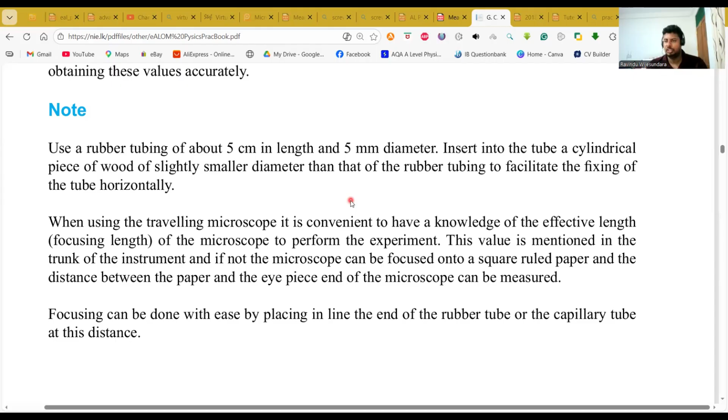So try to think of these practicals, try to see some videos of the practical. You can actually search. If someone requires, please let me know, then I can share the links so you can go and learn by yourself. So I'm here to explain the fundamentals and basics, and I will go according to the syllabus. But if you need to understand more, then you have to do some self-search. That part you have to do.

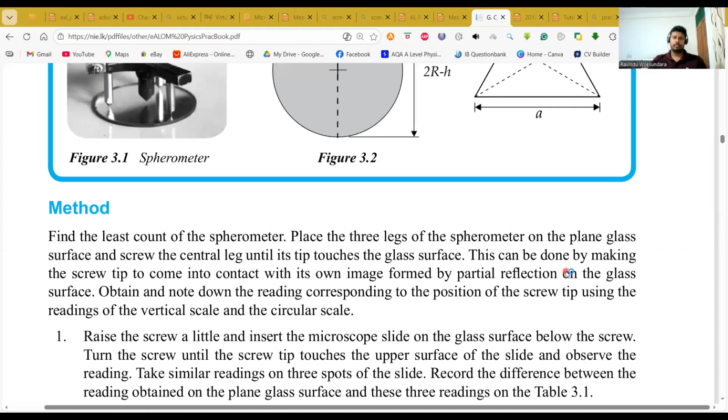So this is all about the traveling microscope. I hope I covered everything about the traveling microscope with that one. So we have only one instrument remaining. Next week we will complete the spherometer. We will not take much time on that one. And after that, we will move to one of the interesting parts of our lesson.

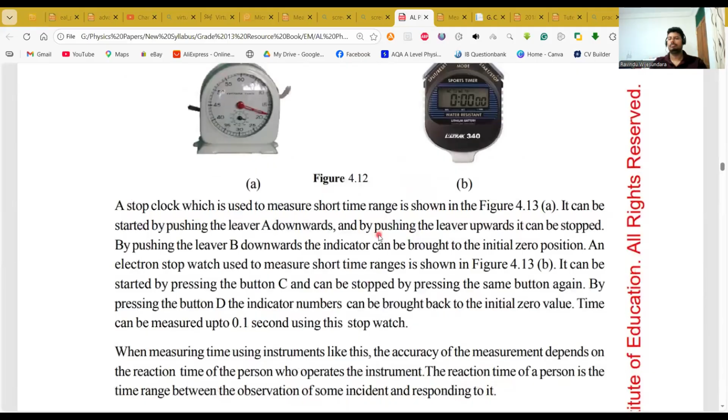So what is that? What are the things we have to discuss under this lesson? So if you go to your resource book, there you can actually read something about the spherometer. Then we have a time measuring instrument, that is not much.

We don't need much discussion about these measuring instruments. This one is also not much important - this is called the mass measurement, we call this a triple beam balance. This is also not that much important compared to the vernier caliper.

Actually to measure masses, we do not need this one now. We have digital scales - you can put it directly and use the digital scale. That is accepted in examination also. A digital or electronic scale is accepted as an answer to measure the mass, so you don't need to go through the trouble of hanging masses somewhere to take the measurement.

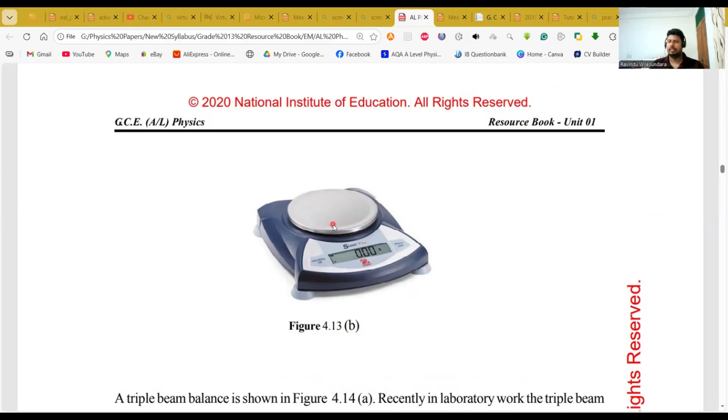That is not actually much required. You have sophisticated technology like this - an electronic scale where you can read directly. For now, in industrial applications, you have micrometer screw gauges, digital micrometer screw gauges, and digital vernier calipers. If I quickly show you, this is an image of a digital vernier caliper.

Mostly in the industry this is used now because people do not have time to find the least count first and then read. In industry we have digital ones, so they have an accuracy of 0.01 millimeters. Some of them have up to 3 decimal points, 0.001 millimeters, because they are electronic. So we can take very high accuracy.

This is an electronic vernier caliper, so there are a lot of uses of this one. You can push them together and press the zero button, then everything becomes zero - that means if there's any zero error, you can remove it. So no zero error using this one. When we are using the analog ones, not the digital ones, you have trouble, right? But in our A level we still have to use the analog vernier caliper, that's why we have to learn about that.

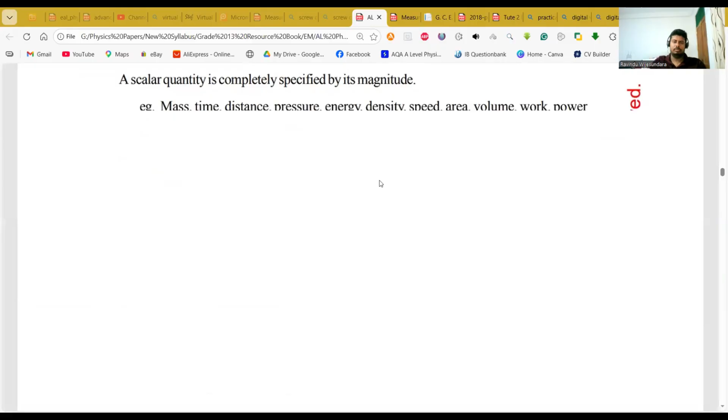So these are the things about the measuring instruments, you can read on them. Then we can go to one of the interesting parts in physics - the next week covers scalar quantities and vector quantities.

This is one of the most important as well as an interesting part where you can do a lot of questions also. For math students, this will be a help because they have to learn about vectors in maths also, so it will be a great support for you too. Without learning vectors, we cannot go to the biggest part of physics.

One of the biggest contents - you need mechanics, and you cannot go to mechanics without knowing vectors. So after this, basically mechanics - we have discussed a lot of things on mechanics already. Okay, so this is our plan: we will complete the spherometer next Tuesday, and then on the same day we will start vectors.

Don't miss that one because it's one of the most important parts, like the graphs. Everywhere in physics we have to use vectors because force is everywhere, and force is a vector quantity. So to work with force, we have to learn vectors. Even in advanced physics courses we are using vectors - most of the questions are basically vectors because a vector has direction and magnitude. So you will learn them in detail.

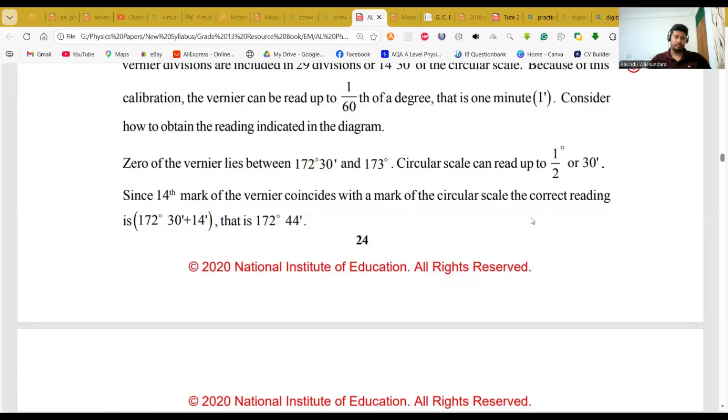So if you have any question, please raise now.